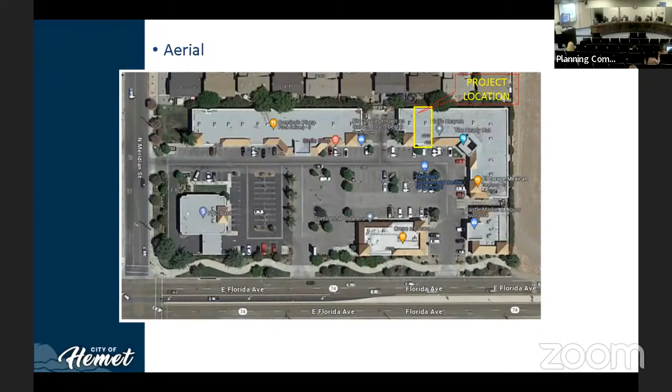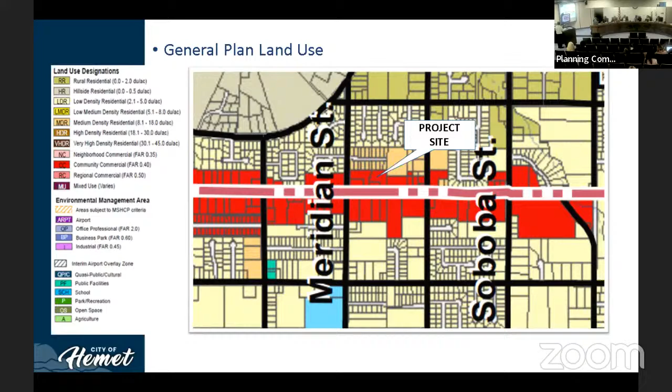Again, the item before you tonight is for conditional use permit 23-004. The proposed project will be located within the Meridian Commercial Center, located on the corner of Meridian Avenue and Florida Avenue. This proposed project will be located on the northeast wing of the shopping center, and it will occupy the vacant suite that is approximately 1,209 square feet. As you can see, it has been highlighted on the shopping center, and it has a planned use of community commercial.

The proposed project will be a new type of indoor entertainment in which a number of people, for a maximum of 8, will be entering a series of rooms in which they will work together to solve a number of puzzles using logic, within a time frame, to be able to move forward into the next event.

As stated, the business hours are indicated to be 3 to 9 p.m. Monday to Thursday, which would have minimum impact with those businesses that exist in the shopping center. It will be operating from 9 to 9 p.m. on Friday, Saturday, and Sunday, which again will have minimum impact with those existing businesses at the shopping center.

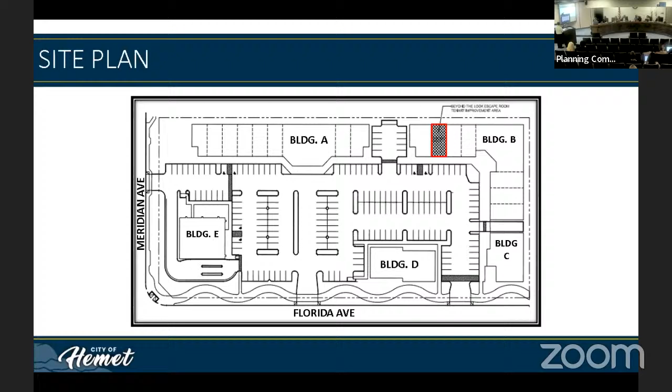This is the specific location within the Meridian Shopping Center. Currently the property or the suite is vacant. This is the existing floor plan, just a shell. There's nothing there other than the unit and a bathroom in the back. They will be providing 6 different scenarios, 6 different rooms, in which they'll be going from one to another as they progress through their scenarios.

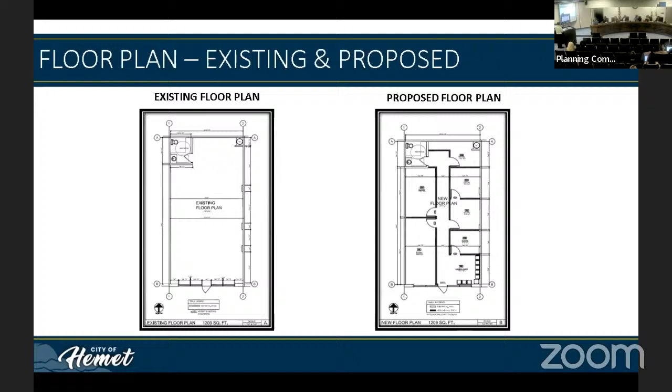Again, they were specifically focusing on the hours of operation so they wouldn't have an impact with existing businesses. We did get a call from one of the business owners within the shopping center. However, they did not specify their name or their business, but they were concerned just because of the name - it said escape room, and they were a little concerned. They're saying, well, what are they going to do? Are they going to be, I don't understand. And we had an opportunity to let them know about the new indoor recreational facilities, which are actually becoming very popular within the adjacent cities.

One of our concerns was obviously the number of people that will be attending this indoor recreational facility, but they will be also providing the means of ingress and egress to this facility. I would like to specify that none of the rooms will ever be locked, okay? They will be open at all times, and they're going to have a supervisor or an attendant there during all business hours.

With that said, based on the findings, we're recommending approval for the conditional use permit 23-004, Beyond the Lock escape room. And the applicant is here as well if you have any questions.

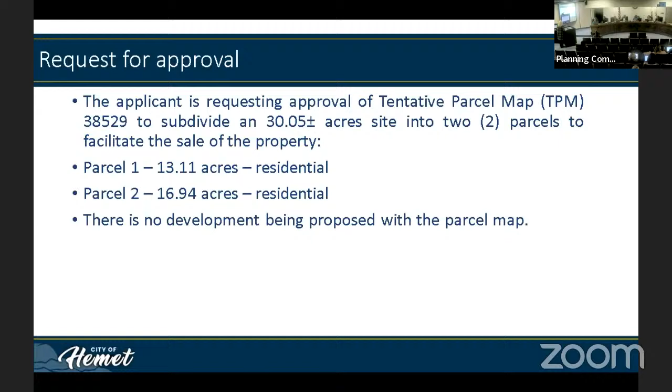What is being proposed is a 30-acre site being split into two parcels. Parcel 1 is approximately 13 acres, and parcel 2 is approximately 17 acres. There is no development being proposed with this parcel map.

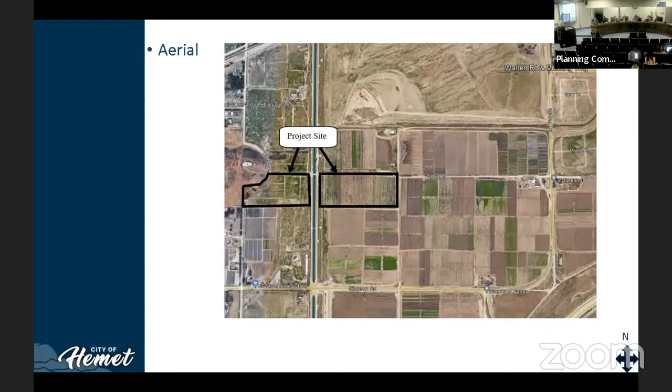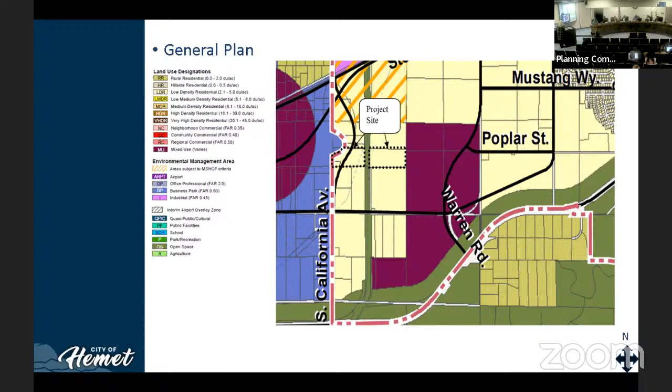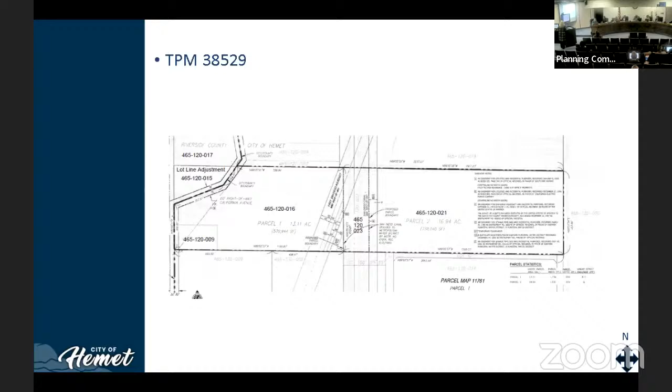The San Diego Canal right now is 175 feet wide, and it shall remain that width, so this parcel map is not affecting the canal at all. Easements are typically no-build, and it does have several easements on site. Once a tract map is proposed, conditions of approval shall address utility easements and the right-of-way.

The findings primarily had to do with the specific plan, with densities, with development. Many of these findings did not apply because this is just a lot split. Development didn't apply, and neither did conformance with the other tract map findings.

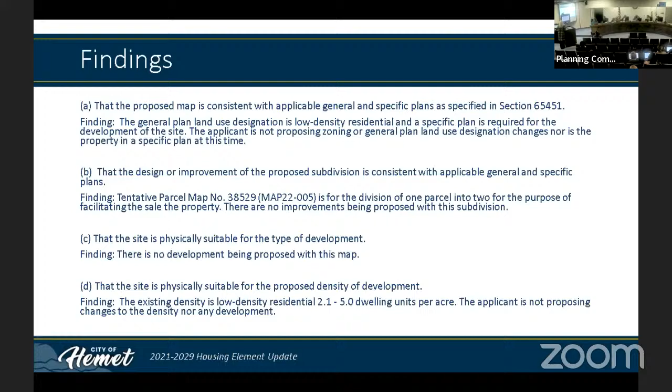I won't take the time to read them all, but they were in your staff report. The general plan designation is low-density residential, and there's no proposed change to the general plan. The zoning requires a specific plan, and there is no development proposed with this map.

This project is exempt from CEQA under section 15315, Class 15, a minor land division. Class 15 consists of the division of property in urbanized areas, zoned for residential, commercial, or industrial uses, into 4 or fewer parcels.

It is respectfully requested that the Planning Commission adopt the resolution to approve tentative parcel map 38529 for the division of 1 legal lot into 2 parcels to facilitate the sale of the property, based on the findings and exhibits and subject to the conditions of approval, and direct staff to file a notice of exemption with the county clerk. This concludes my presentation, and the applicant is also here to answer any questions directed to him.

Thank you, Carrizosa. Does the commission have any questions for the staff at this time? I do. Ms. Carrizosa, how are you? I'm doing well, thank you. Good, okay, so let's go to the lot line adjustment. Okay.

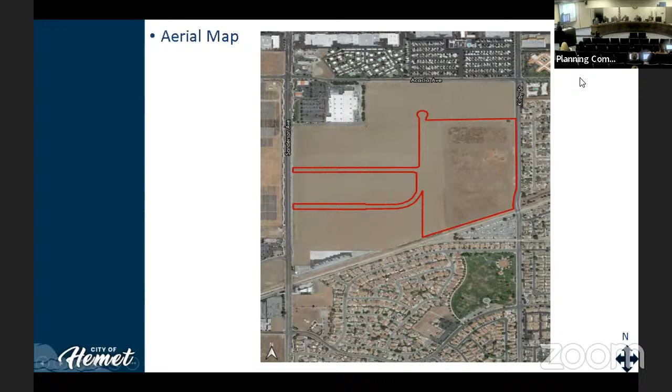The property maintains a general plan land use designation of business park, which provides for single and multi-tenant light industrial, flex office, and office uses. Suitable uses include corporate and general business offices, medical uses, research and development, e-commerce, and light manufacturing. Ancillary support commercial uses such as restaurants and hospitality to serve the business community are also permitted.

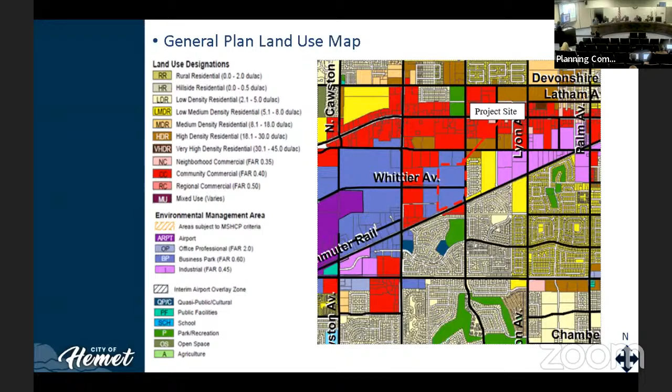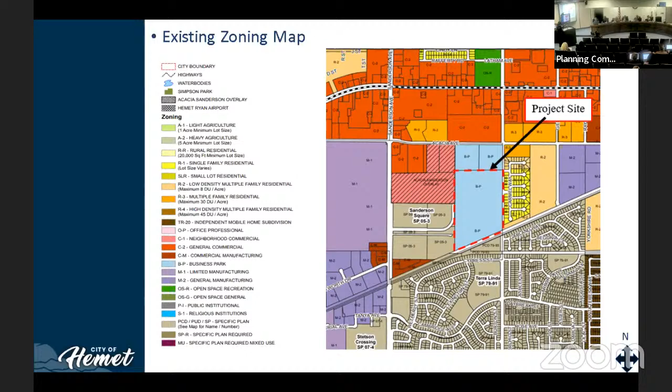The existing zoning on the property is business park, reserved to appropriately locate single and multi-tenant light industrial, flex office, and office uses, including corporate, general business offices, medical, research and development, e-commerce, and new technology uses.

The single tenant warehouse includes 19,292 square feet of office space on the 43.56 gross acre site. The overall improvements include landscaping, site security fencing, walls, sidewalks, utility connections, implementation of stormwater facilities, pavement parking, and right-of-way improvements and driveways.

Truck access would be served from Sanderson Avenue. Vehicular access for employees and general office uses would be served from Kirby Street, a 4-lane undivided secondary collector. The applicant is required to dedicate 47 feet of right-of-way along the project frontage of Kirby.

Truck loading docks would be located along the east and west sides of the building. The building would include 132 dock doors and 4 grade level doors. The proposed project would also provide 163 trailer parking stalls located along the east and west boundaries of the project site.

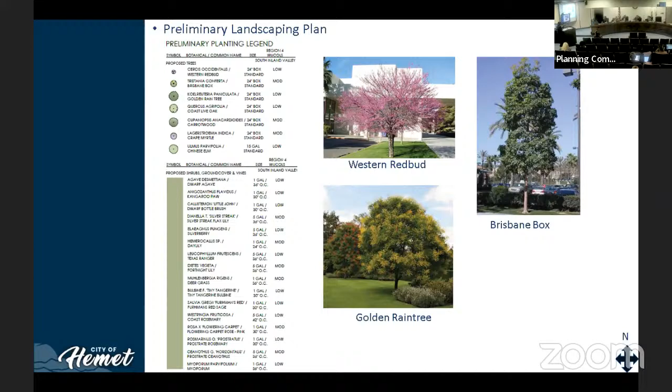Illustrated here are some of the vegetation and the proposed trees, which include the golden rain tree, the Brisbane box, and the western redbud, which are proposed as part of the overall design development.

The architecture of the building includes a concrete block material, scored wall patterns, recessed horizontal paneling, and interplay of accent colors that provide visual interest to the building. The exterior colors are a mix of white, modern lavender, and grays, as well as brushed carbon storefronts in Arcadia storefront mullions clear, and storefront windows in vitro solar gray and Solarban.

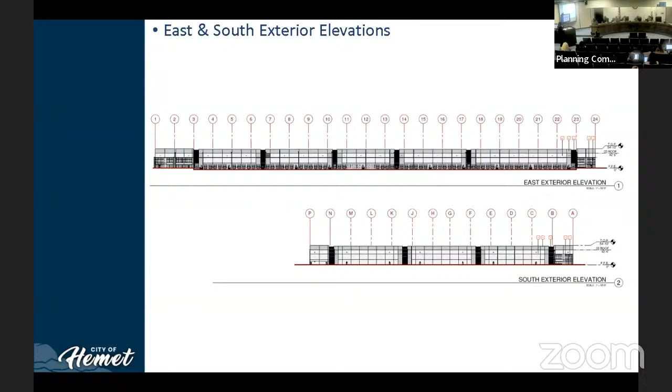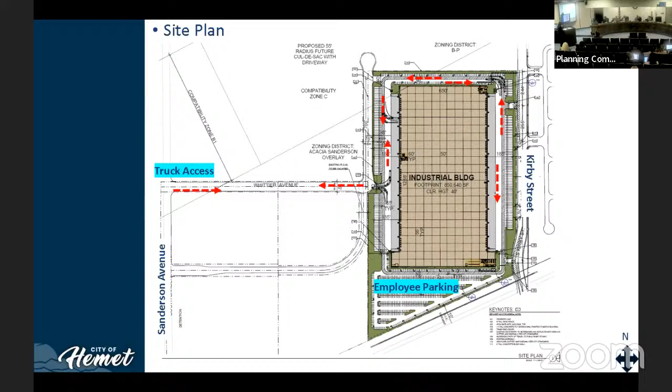And then also, before I go into the variance proposal, I would like to talk a little bit about the operational characteristics of the project. The operational characteristics include employee shifts and estimated number of employees per shift.

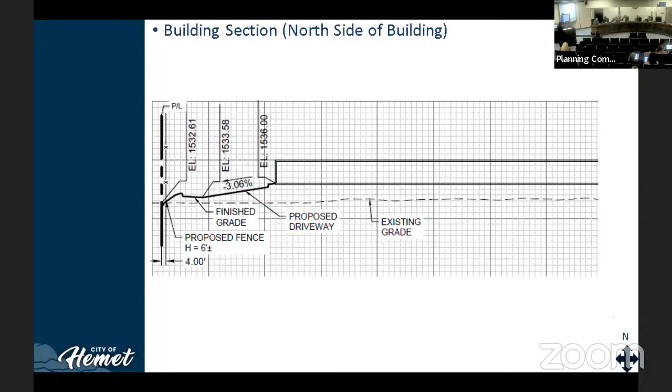Looks like that slide went missing. So, the hours of operation is 24 hours, 7 days per week, overall for the development.

The operational characteristics are broken up into 2 shifts. Shift 1 would be 6 a.m. to 3:30 p.m., approximately 350 employees. Shift 2 would be 4:30 to 2:30 a.m., with approximately 100 to 200 employees.

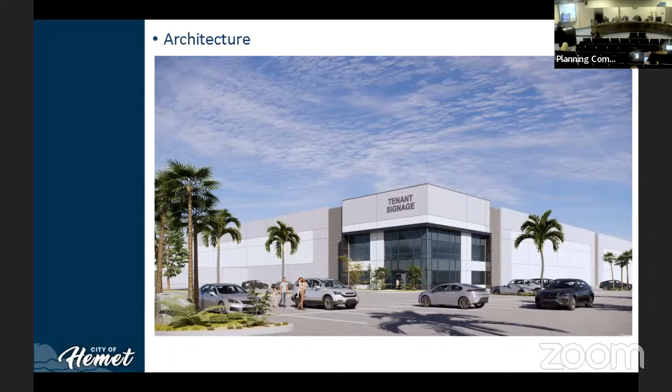The truck delivery hours are primarily within the hours of 7:30 a.m. to 4 p.m. Truck loading and unloading: 75% of the loading is on the west side of the development from 7 a.m. to 6 p.m., and 25% from 7 p.m. to 12 a.m., with east doors for outbound loading and unloading.

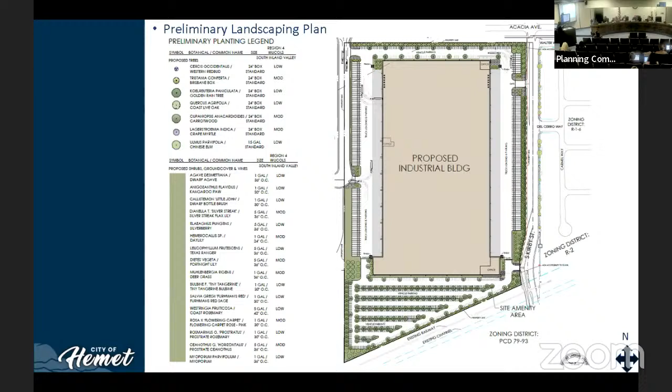The request also includes a wall totaling 14 feet along Kirby Street. The applicant is requesting a variance from the standard regulation of 8 feet for security fencing. And the purpose for the variance is twofold.

The property is located approximately 100 to 165 feet from single-family neighborhoods along the east and southeast of Kirby Street. The noise vibration report prepared by the applicant's consultant and reviewed by the city's consultant identified the potential noise and vibration impacts as part of reduction measures associated with the warehouse development. In this case, the proposed 14-foot height would provide noise reduction measures to comply with our noise standards.

In addition, the wall has been included in the design of the project to provide screening of loading and truck bay areas. This would provide a substantial buffer between the proposed facility.

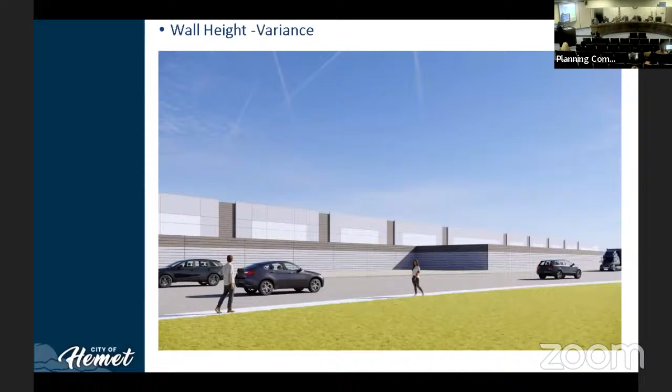So this is an existing illustration of the wall without any landscaping, just for the commission's reference. However, the landscaping would be planted, and this is the elevation as viewed from Kirby Street. This is also an additional perspective and view from Kirby Street with the landscape screening, looking at the overall separation and screening from the residential areas to the east of the development.

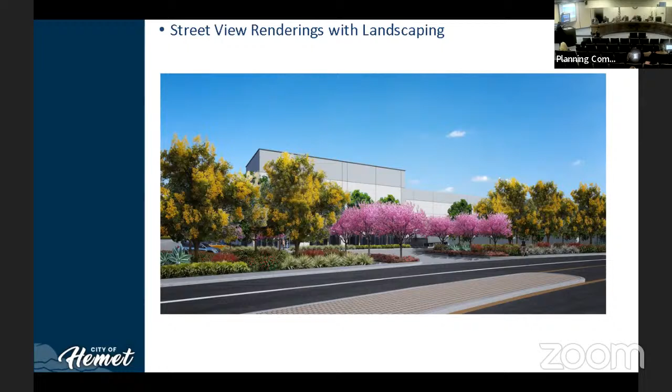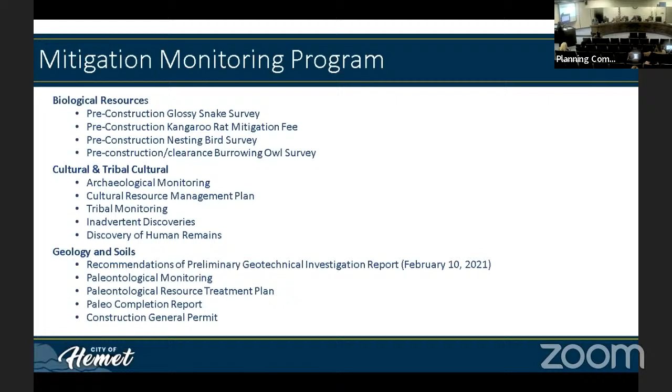As part of the development environmental process, the project includes an addendum to the City of Hemet General Plan final environmental impact report, previously certified by the city, which serves as the environmental review for the proposed project. As part of that, there are mitigation measures included in the overall conditions of approval, including biological resources, cultural, geologic, air quality, noise, greenhouse gas, hydrology, and water-related conditions of approval.

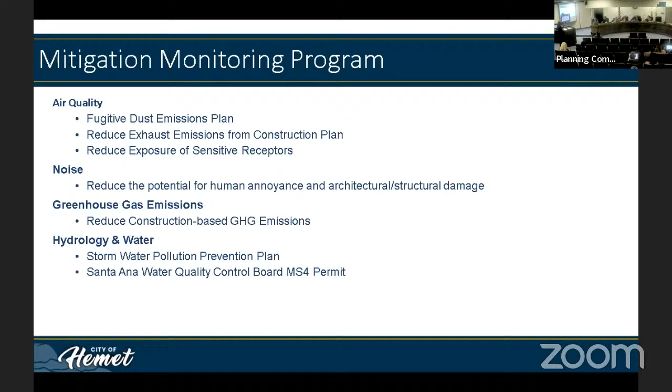Pursuant to CEQA section 15162, none of the conditions of the review would trigger the need to prepare a supplemental environmental impact report. In accordance with 15162 and 15164, the addendum documented that the development of the site is consistent with the approved uses in the City of Hemet General Plan and zoning designations and within the assumptions that were evaluated in the final EIR.

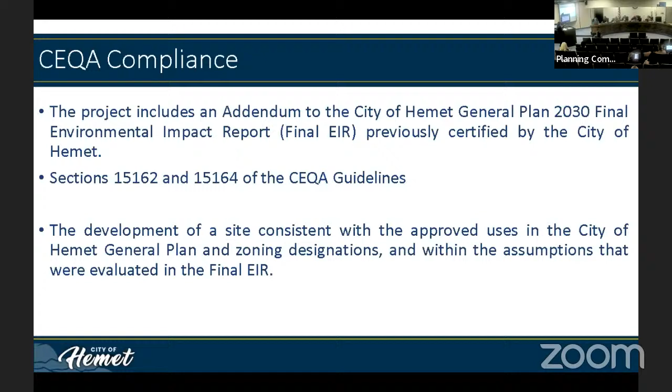On November 22nd, 2023, the city gave notice in the Press Enterprise and by mailing to property owners within 500 feet of the subject property of the holding of the public hearing. To date, staff received correspondence from Debbie Chamber, who provided comments back in March when the development was moving forward.

One of her questions was whether or not they could build 2 to 3 additional blocks on top of the walls located to the south of this property. She did contact staff today to reconfirm that is what she is asking for. She indicated she would not be able to attend this meeting this evening, but wanted to be assured that her request for additional wall height for view preservation of the site would be entered into the record.

With that, this concludes my presentation. The applicant is also here this evening on behalf of the owner, as well as our CEQA consulting firm. Staff is recommending approval of the development subject to the conditions of approval, as well as requesting that the commission direct staff to file a notice of determination with Riverside County. This concludes my presentation.

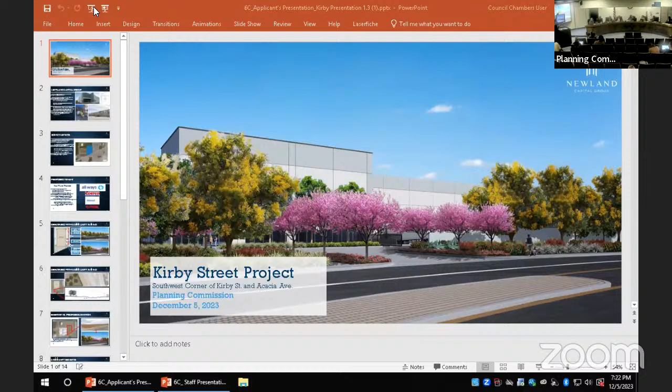Thank you. So I'll go through this presentation. Monique did a great job with her overview, and it looked great to see all the detail in there and have her present, so I do appreciate that. First, I want to thank Monique for her time. You have a small but mighty staff here. You have a lot of projects and things going on in the city, and it's appreciative to have people like her on staff to help projects move through the process. So, of course, I want to welcome the new Public Works Assistant Director, Jolene, who's in the audience, and she's been great, starting recently and jumping into the detail a lot, because it's a lot to catch up on.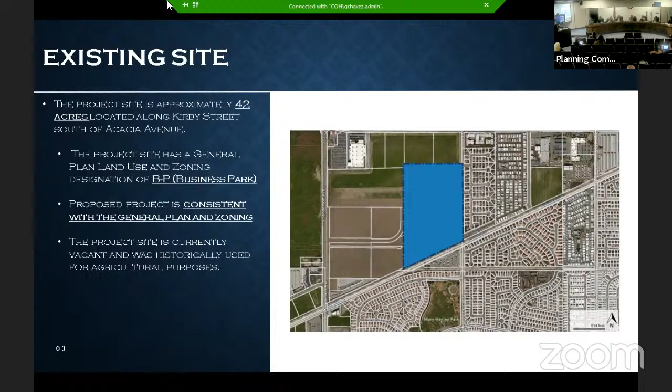So the tenant is Always Pacific. They're a global end-to-end distribution company. The warehouse would not include cold storage, so no cold storage is planned.

I appreciate the question, Commissioner Papp. That is an important one that we consider in CEQA very closely. They provide apparel needs for large names that you see on the screen there, that you're probably very familiar with. And importantly, in order to fulfill those needs, we need jobs, or the tenant will need employees to fill the jobs.

The reason they've looked at Hemet is they see a labor force that has not been as tapped or utilized as many other areas throughout the Inland Empire, like the Mead Valley area on north into San Bernardino. You've heard a lot about these projects going on there, which is pulling from the labor force and leaving not a very competitive environment and fewer people that they can hire, or they hire from down in this area, which people have to then commute to those further away areas.

In this case, they want to move to the labor source which they feel is strong. Again, another reason why they wouldn't come down here without that opportunity. They see that as a very strong potential to fill their workforce, which, as you can see with 550 permanent jobs, is a big number. It's not a small number, and it's really important, and these are well-paying jobs.

Also, during the holidays, as it mentions, they do have to bulk up to fulfill the order needs that occur at that time.

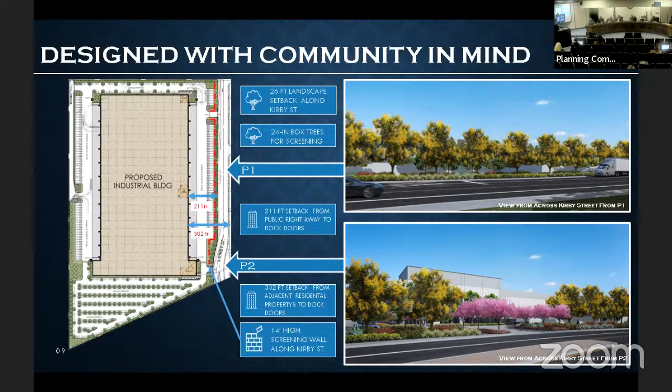When we were talking, her concerns were about her view of cars parking in that area, lights shining in, and the experience of an open space area turning into parking. So we added additional landscaping along that south edge to ensure she would not have that experience, similar to Kirby, with a multi-layered effect of ground cover, shrubbery, and trees to reduce visual concern or impacts from residents along that edge.

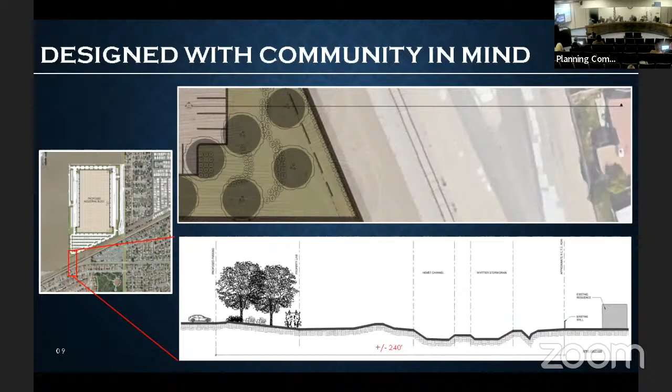In terms of community benefits, the site improvements are specific to Sanderson, Whittier, and a number of the street frontages. We're going to be constructing either Olympia or Whittier. The most latest development, as you've heard from Monique, is that we're really trying to push for Whittier because that's the ultimate plan for that area. We're undergrounding power lines along the frontage, adding new sidewalks, streetlights, landscaping, and street trees. That's a major amount of site improvements.

Development fees are approximately 1.5 million, of which about $1 million goes to the city, 664,000 to the school district. As far as jobs are concerned, there's 600 temporary construction jobs, temporary being for about 2 years of construction. So the construction is going to bring a fair amount of jobs out there in the near term, and we also have some additional holiday jobs.

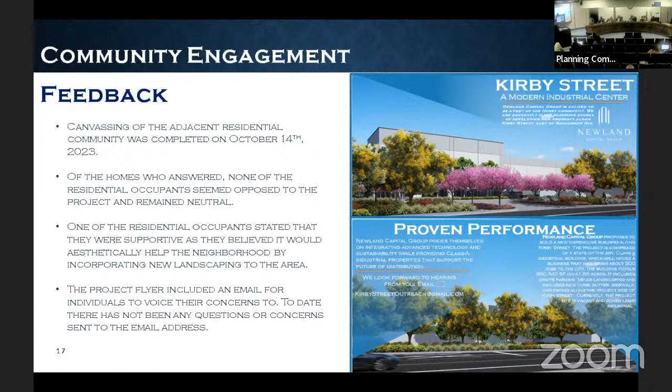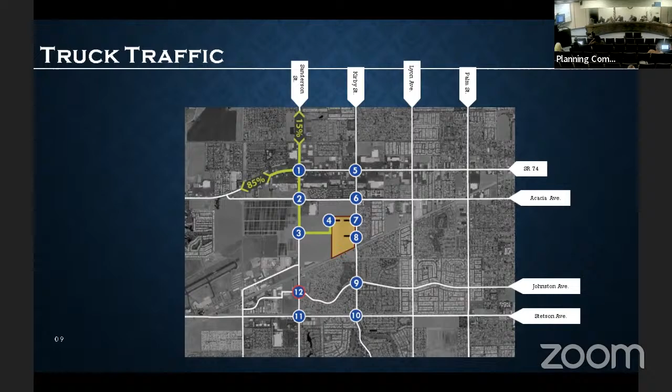In order for the project to move forward, we have to design a storm drain system that will connect to Sanderson. In order to get our grading permit, we have to have an area to locate that storm drain. So that's a condition of approval—we can't pull a grading permit unless we have that storm drain system in a location along one of those two streets.

We have been working with the neighbor very closely to identify how that will occur. They have committed to dedicating land along their north property boundary, north of those buildings, where Whittier would be developed, and in that area we could build the storm drain. If that did not occur, if they bow out, we would use Olympia because that's an existing right-of-way, and we wouldn't have to wrestle to get a right-of-way that we don't own at this time.

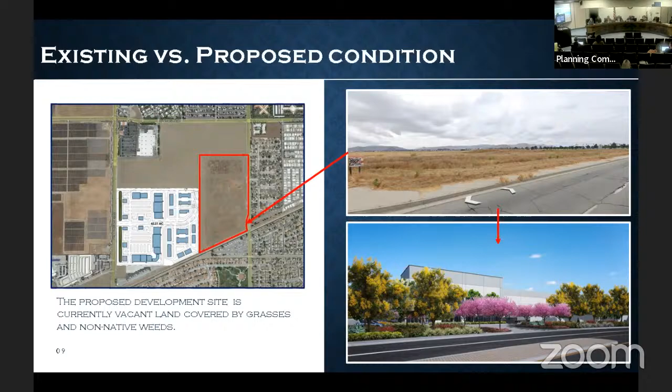No, but I'd like to say thank you very much for bringing this opportunity to the city of Hemet. This is really, really an exciting project. Thank you, Commissioner.

Questions? Just one clarification - Whittier will be built out before certificate of occupancy, correct? Yeah, it's either Olympia or Whittier, and the way things are going today, it sounds very likely it'll be Whittier, and everybody hopes that.

Because of this project, we're looking at the entire area from Acacia to Kirby to Sanderson down to the railroad tracks. The city also required, where Whittier connects to the western property boundary of our site, a road along our western boundary going north to the northern property that fronts Acacia. The intention is for trucks to be away from Acacia and Kirby, which have residences along that stretch. So this project will provide dedication and improvements along our western boundary to pull trucks if the project to the north builds in an industrial fashion - there'll be a secondary access focused for trucks. So again, another benefit of this project for this block of the city. But specifically to answer your question, yes, it would be constructed and completed by C of O.